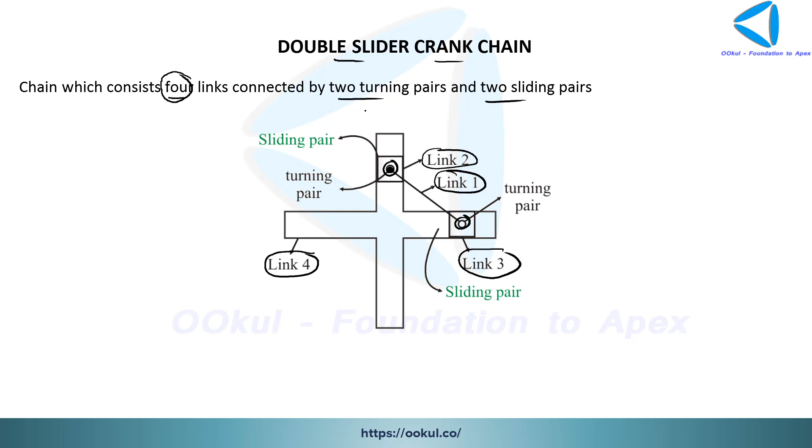And then there are sliding pairs: one sliding pair between link 4 and link 3, and one more sliding pair here between link 2 and link 4. So it consists of 2 turning pairs and 2 sliding pairs. So let us see what are the inversions. There are 3 things which can be fixed.

One is, if your slotted bar is fixed, we get the inversion called the elliptical trammel. Second, if any one of the sliders is fixed, the inversion we obtain is known as the Scotch-Yoke mechanism. And the third one is, if the link connecting the sliders is fixed, we get an Oldham's coupling. So now let us understand them one by one.

Starting with the elliptical trammel, we say that the slotted bar is fixed. How does this mechanism function? Let us see with the help of this video. The slotted bar is fixed and the link and the sliders are moving. Just simply see this point, how this point is tracing the path like an ellipse.

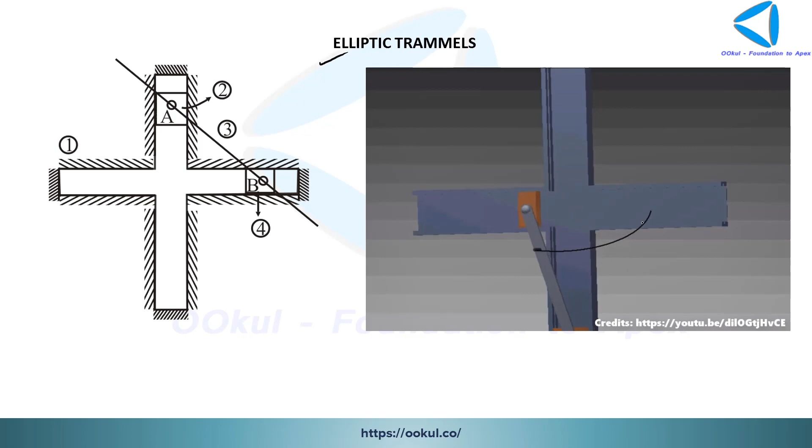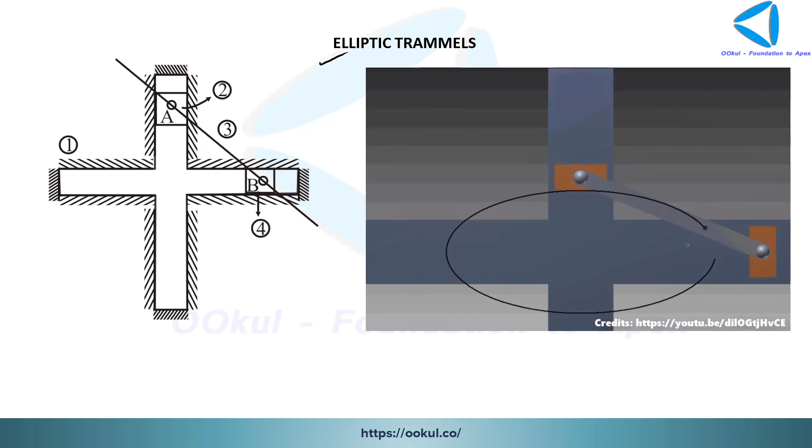When the slider and the link are moving, you can see the path traveled by this point, which makes the path of an ellipse. Hence the name elliptical trammel. So please remember one thing: any point on this link other than the center, the locus of that point will be an ellipse. Hence this name elliptical trammel.

But if we consider the locus of the center point between these 2 sliders, then we get a circle. That is a very special case, the locus of the midpoint of the link connecting the 2 sliders is a circle. In every other case, we get an ellipse. Hence the name elliptical trammel. And this is the inversion of the double slider crank chain when your slotted bar is fixed.

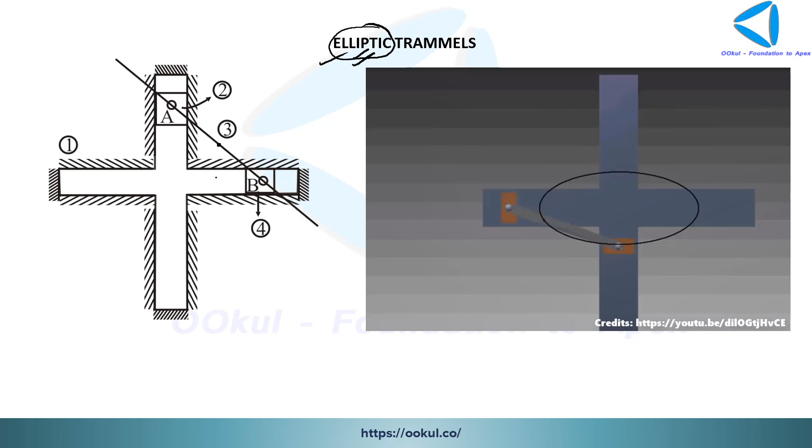Now let us see another inversion known as the Scotch-Yoke mechanism. First of all, let us understand it through this video, and then we will see the basics about it. This is the inversion obtained when one of the sliders is fixed. The center through which it is rotating, you can take that as one slider, and the other slider is moving.

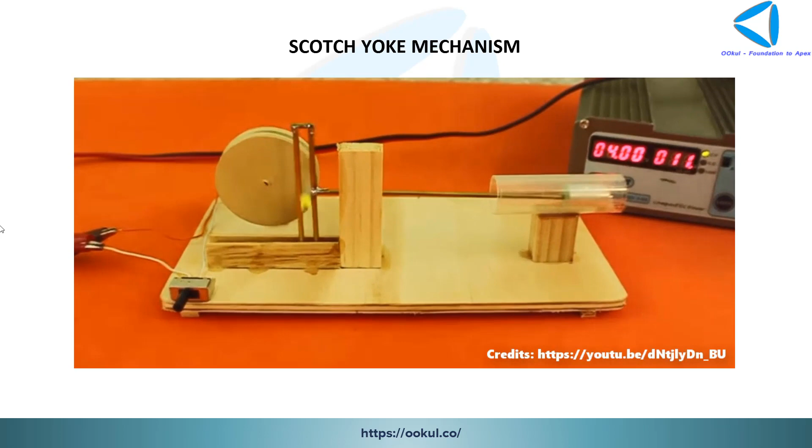So another slider is moving, and you can clearly see how the motion has been translated. The rotational motion has been converted into translational motion. This is the Scotch-Yoke mechanism, and this is used in the hacksaw cutting blade.

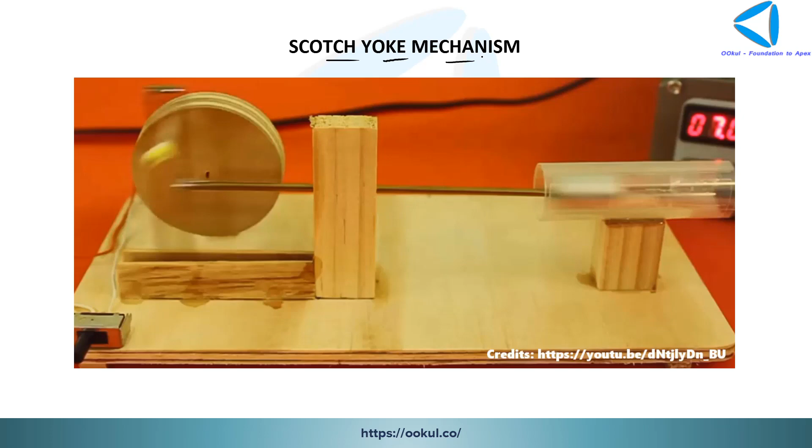In the workshops, you might have seen that there is a hacksaw cutting blade. So there this mechanism is used. Now let us come to this analysis. In this, I told that one of the sliders is fixed. This slider is fixed, and when this slider is moving, it is moving in a circle like this.

So what is happening? You can yourself see that there is a rotational motion of this link. Basically, this link is rotating. So this slotted bar is doing a translational motion. So this is another inversion of the double slider crank chain in which one of the sliders is fixed.

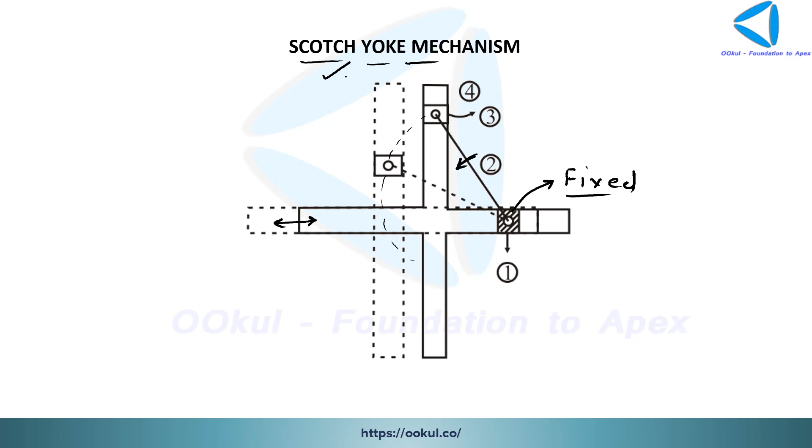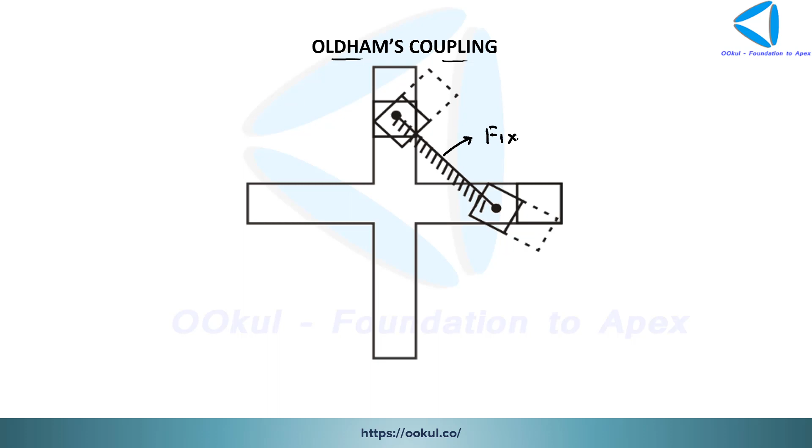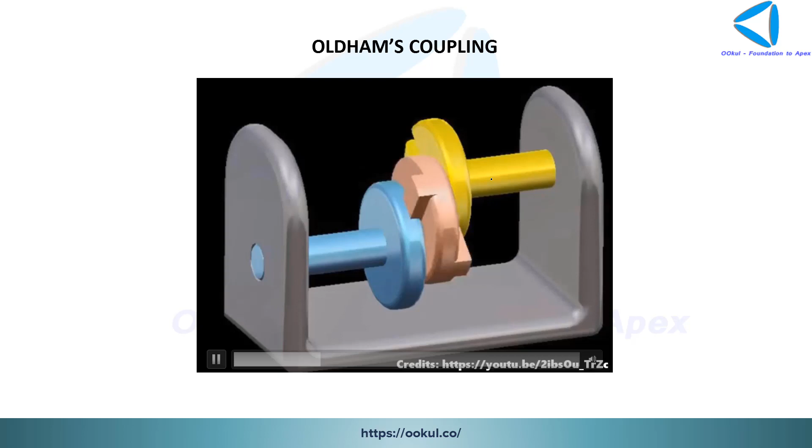Now let us move on to the third and the last inversion of this double slider crank chain, in which the link connecting the two sliders is fixed. Here you can see that this is the link connecting the two sliders and this is fixed. So let us understand it through the help of this video again. See this. The link connecting the two sliders is fixed. So this mechanism is basically used for the connection of two shafts which have lateral misalignment.

This is the line of this shaft, and this is the line of this shaft. So they have lateral misalignment. This is the lateral misalignment, and this coupling is used for the transmission of power, or you can say the connection between the two shafts which have lateral misalignment. This is known as Oldham's coupling. This is the inversion of the double slider crank chain when the link connecting the two sliders is fixed.

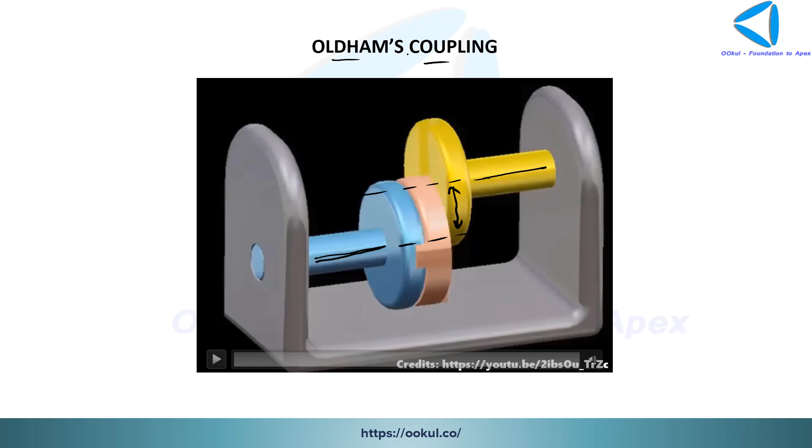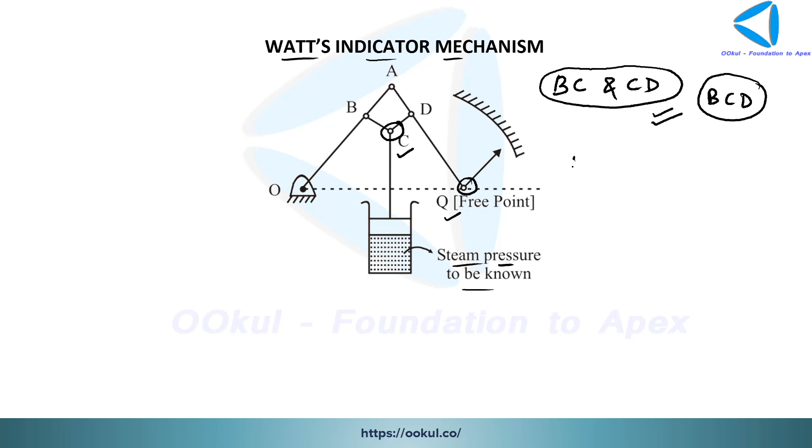Another thing is that point C and point Q move in an approximate straight line. Please remember, point C and point Q move in an approximate straight line. Hence this mechanism is also known as an approximate straight line mechanism. Please remember this: the approximate straight line mechanism is the Watt's indicator mechanism.

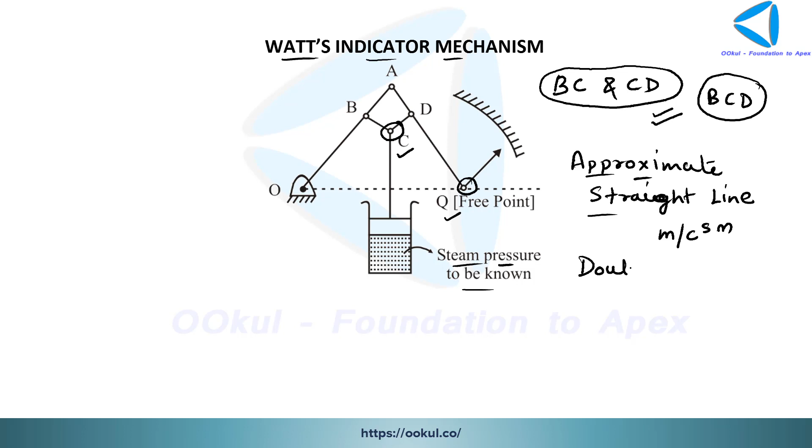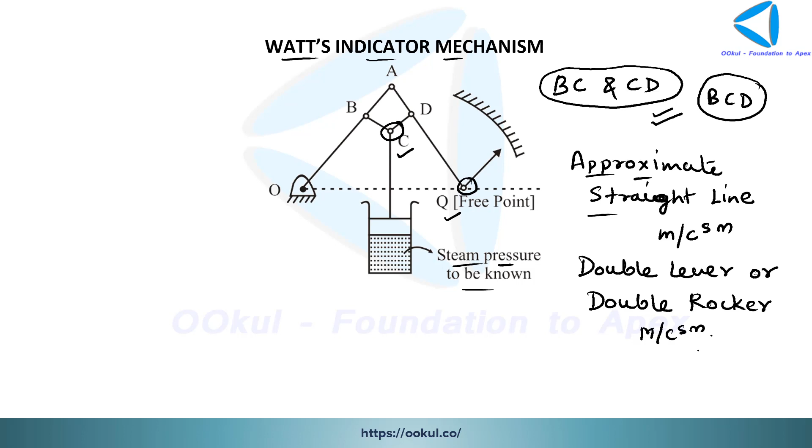So these are the observations: BC and CD behave as one link because there is no relative motion between them, and points C and Q move in an approximate straight line. So this is an approximate straight line motion mechanism, and this is also a double lever or a double rocker mechanism.

With this we have completed our simple mechanisms, and now we will be proceeding with other topics of this subject, that is theory of machines. The next video will be on velocity analysis, and then we will move on with other concepts. In between you will also get some videos on important previous year questions, where we will see what kind of questions have been asked from this topic in the GATE and engineering services examinations.